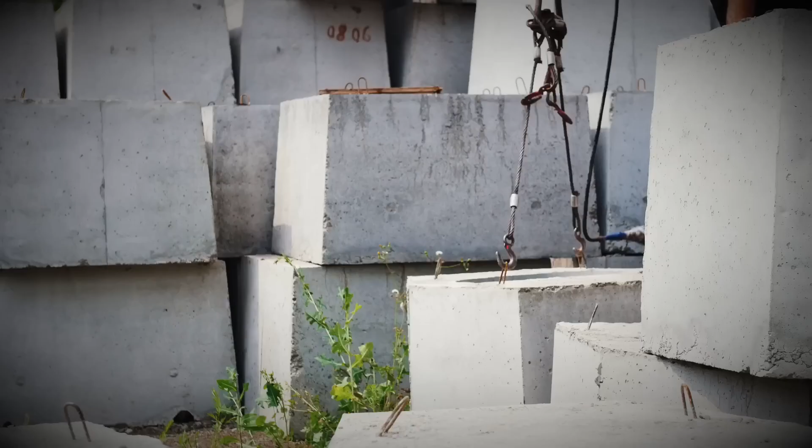If planned correctly, high-rise blocks could have similar square footage to a small terrace house. And once all the garden space is taken away to be replaced with communal areas, the overall space available to residents would actually be greater. The new towers were to be easy and quick to make due to prefabricated building methods, and thus able to transform social housing stock to a community and socially focused ideal.

Things like streets in the sky were envisioned as a modern take on the old-fashioned neighbourhood community feeling. This was the era that fostered a greater societal safety net, such as the NHS and nationalised British Rail after all. I suppose the optimistic feeling must have blinded architects to the nightmares this type of social housing would turn into, when it was discovered that tower blocks, enclosed walkways and open spaces that separated them would become a breeding ground for crime. Anyways, this utilitarian design style was called brutalism and would become a hallmark of British design in the 1950s and 1960s.

The Essex town of Harlow would welcome the UK's first residential tower block in 1951, and many more throughout the country for the next 10 to 15 years would be thrown up. The cheapness and ease of construction found its way to a new residential estate in Newham, East London. Ronan Point. Newham Council was birthed in 1965.

It was the result of a ménage à trois of 3 previously independent county boroughs: East Ham, West Ham and Woolwich. The new local authority completely enveloped East and West Ham, but only a part of Woolwich in the form of the borough north of the River Thames, which is around here on a map. The brand spanking new borough, although still in its packaging box, had old problems. Housing. It had roughly 9,000 people on the waiting list for social accommodation. As such, it sought to try and solve this problem with new housing projects.

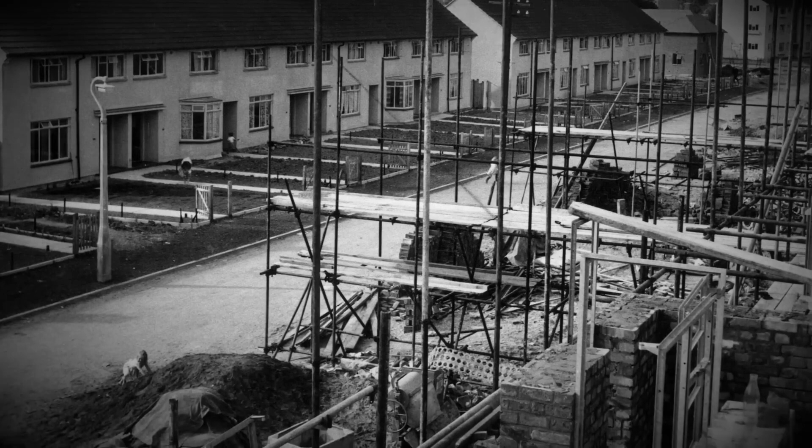Roughly a quarter of the borough's housing stock had been bomb damaged, with the remainder not meeting modern standards. Many had no running water and electricity. Rather than retrofit, demolition and reconstruction was the plan. Up to the 1960s, much of the council's construction projects were of 2-storey houses and 3-storey flat blocks. Well built and utilitarian, they were good but required skill to build them, and that was lacking in the country. The skill drain can be traced back to the war, where many of the previous generation of bricklayers, carpenters and builders were lost. Just look at post-war houses compared to pre-war houses.

Gone were the bay windows and ornate woodwork. For example, my house is a pre-war construction. A new, radical and easy to build method was required. The problem wasn't unique and, as we saw earlier, had been apparently solved with the implementation of high-rise buildings.

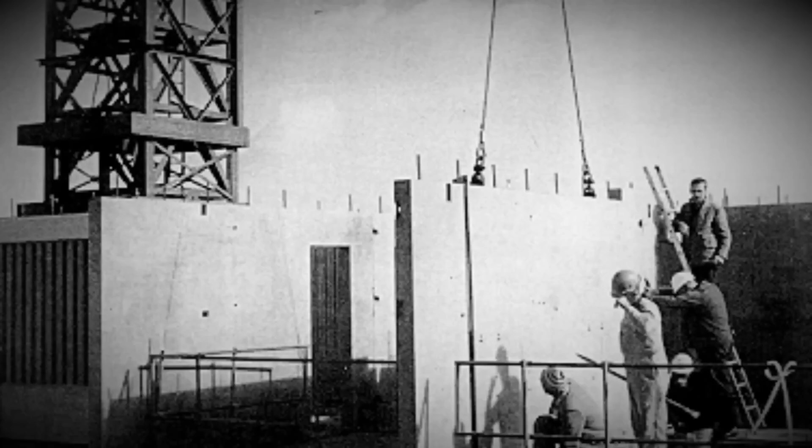The council's architects looked at two prefabricated concrete building systems, one by French engineer Raymond Camus and another by Danish civil engineering company Larsen & Nielsen. Both systems made use of off-site prefabricated concrete panels to be slotted in together, much like a store-bought garden storage cabinet. This was called large panel system building. Out of the two methods, the Larsen & Nielsen system made use of the least amount of skilled labour.

To use the system for the new development, the council had to work with the UK licence holder, Taylor Woodrow Anglian Limited. Now there was actually a financial benefit to building as tall blocks as possible. This came about from the Housing Act of 1956, which introduced subsidies to local councils for every floor that was built above 5 stories tall.

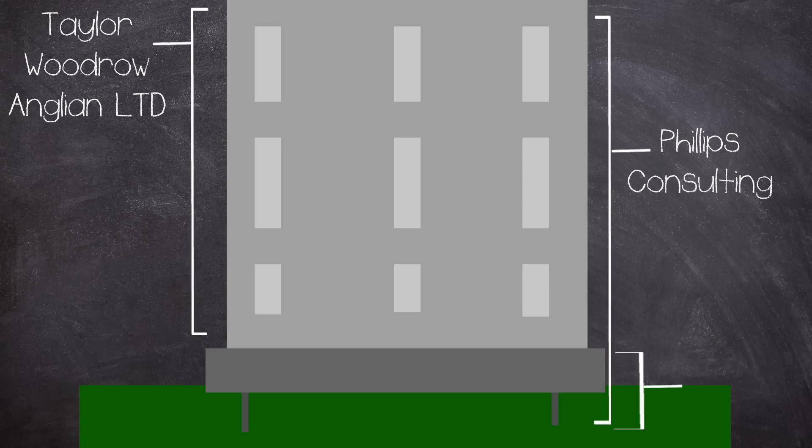Taylor Woodrow Anglian insisted on using a structural engineer called Phillips Consultants Limited, a wholly owned subsidiary of Taylor Woodrow Anglian. To add further conflict of interest, Phillips were hired for the design and construction of the foundations solely by Newham Council, but were employed by Taylor Woodrow Anglian directly for the actual building construction. The contract for 9 blocks was set at £5 million, roughly £500,000 per tower. Ronan Point was to be the second building in this contract.

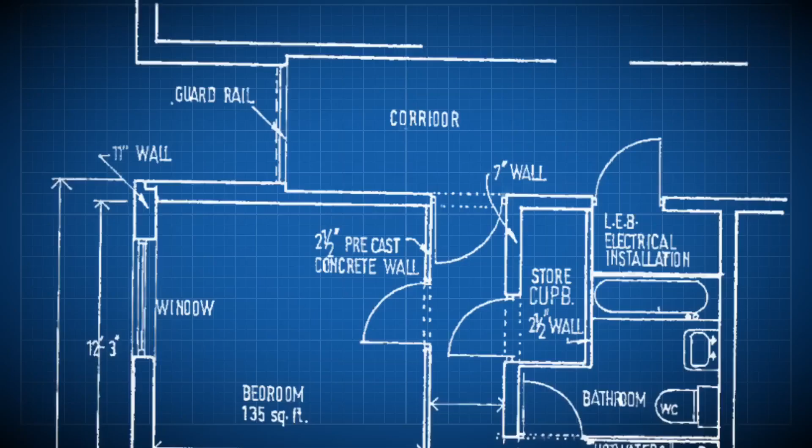The tower was to be 200 feet tall and contain 110 flats over 22 floors, and was built upon parking areas below. Each flat had a number of mod cons, including underfloor heating, gas, running water and electricity. The structure relies on load-bearing concrete panels. These consist of spine walls that make the main corridor, in addition to a number of cross walls at right angles to them and the flank walls that form the end faces of the tower block.

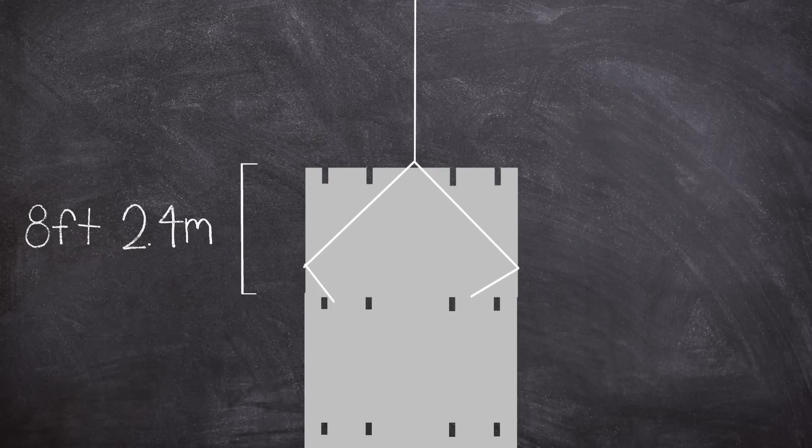The jointing between panels and floors is fundamental to the integrity of the structure. Each load-bearing wall is 8 feet high, roughly 1 story high, 9 feet wide and between 6 and 7 inches thick, and factory made of solid concrete. The floors are built of precast concrete slabs, each, except for the corridor floors, about 13 to 15 feet long. They are also 9 feet wide and around 7 inches thick. Unlike the walls, these are reinforced and are lightened by a number of circular cores.

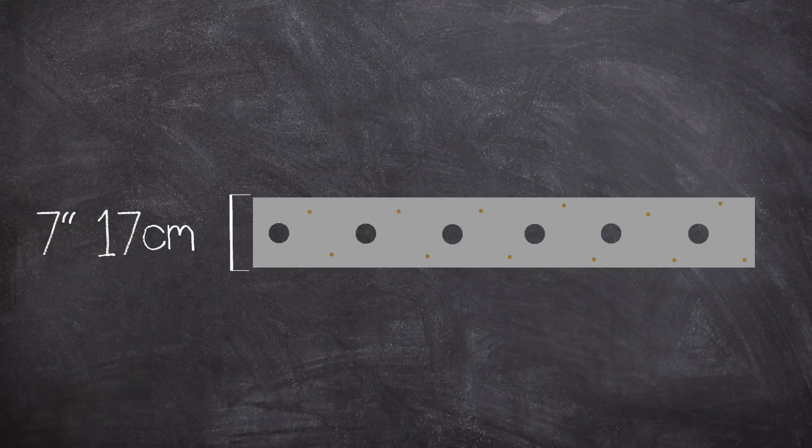To keep the whole structure together, a number of types of joints were employed. Vertical joints between the adjoining walls use overlapping U-shaped steel rods, through which a vertical steel rod is threaded. The whole joint is then concreted in situ. In the horizontal joints between floor slabs, the space between adjoining slabs is filled with in situ concrete, into which a short steel rod is placed over the supports.

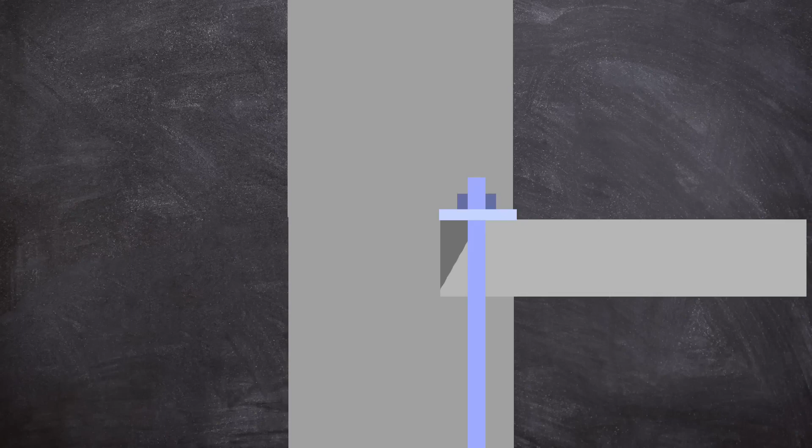The horizontal joints in the load-bearing walls at floor level have nibs projecting from their ends that rest upon the shelf near the top of the wall panels, and the space between the ends of the opposing floor slabs is also filled with in situ concrete. Metal tie plates are at intervals along these joints to help tie the floor slabs to the lower wall panels. When done correctly, all these joints should ensure a strong and stable building.

It would take Taylor Woodrow Anglian roughly 2 years from start to final handover to complete Ronan Point. The council took control of the tower on the 25th of March 1968 and immediately started welcoming residents into the new high-rise slice of living. Even though we consider them ugly now, the novelty of living up high in the sky drew a lot of people to the tower blocks. But this dream couldn't stay up in the clouds for long. Quite literally.

The disaster. It is 5:45 a.m. on the 16th of May 1968. Ronan Point has only been open to residents for roughly 2 months, and the occupant of corner flat 90 on the 18th floor has got up to put on her slippers and dressing gown and went into the kitchen to start filling her kettle to make a cup of tea. The resident of the flat is Ivy Hodge.

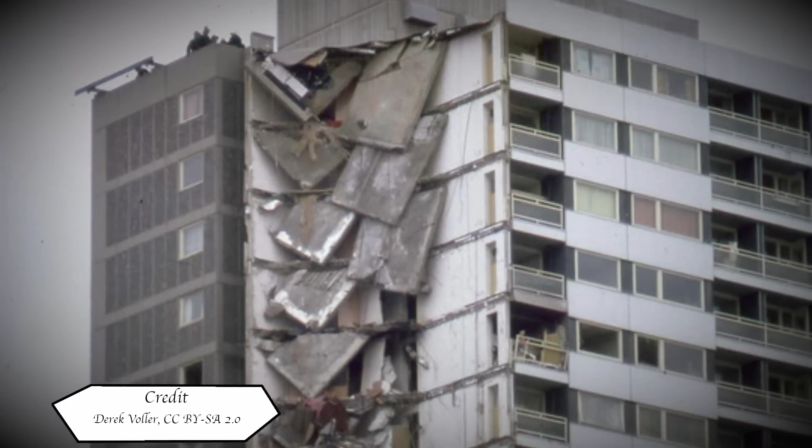She lit a match to light her stove. The spark ignited a gas explosion. Hodge was blown across the room. In a later statement, she would recall, "I do not remember any more until I was on the floor, looking at flames on the ceiling." The explosion blew out flat 90's flank walls, which were supporting the weight of the floors above it. This resulted in a progressive collapse of the southeast wing of Ronan Point. 4 were killed instantly in the collapse. Luckily, due to the time of day that the explosion happened, most residents were still in their bedrooms.

And, as the southeast corner consisted mainly of living rooms, most were safely asleep away from the danger zone. Also, in a stroke of luck, 3 of the 4 flats immediately above Hodge's were unoccupied, further reducing casualties. On the night of the explosion, there were 260 people inside the building, and on top of the deaths, 17 were injured. Residents were evacuated and the block was closed to the public. Many of the inhabitants were rehomed in another tower block about half a mile away.

But how did this new block of flats fail so catastrophically, especially from a gas explosion, which could always be a possibility? Due to the numbers of other buildings constructed in a similar way, the UK government understandably wanted to discover how Ronan Point could have failed. They commissioned an inquiry led by Hugh Griffiths QC. Well, they would find some worrying shortcuts made during Ronan Point's design and construction.

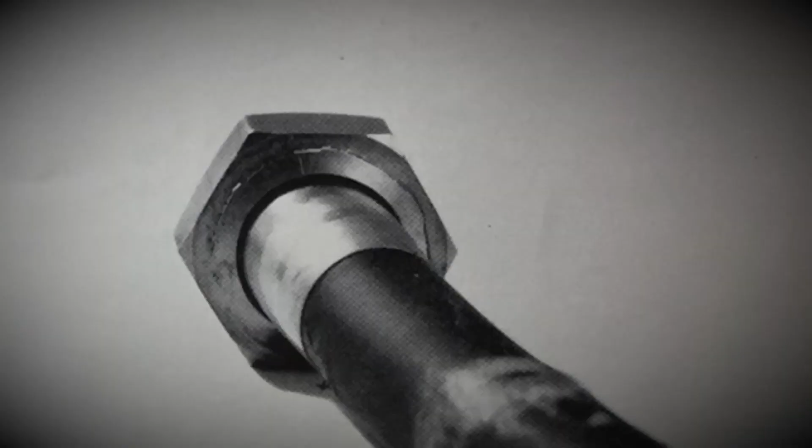The cause. The investigation initially looked at, naturally, what caused the explosion. It was discovered that Hodge had, upon moving in, brought a new stove with her. This gas appliance was installed by a friend as a favour. The investigation found that the installation was acceptable, although eventually a nut used to connect the gas line to the oven had failed and thus caused the explosion.

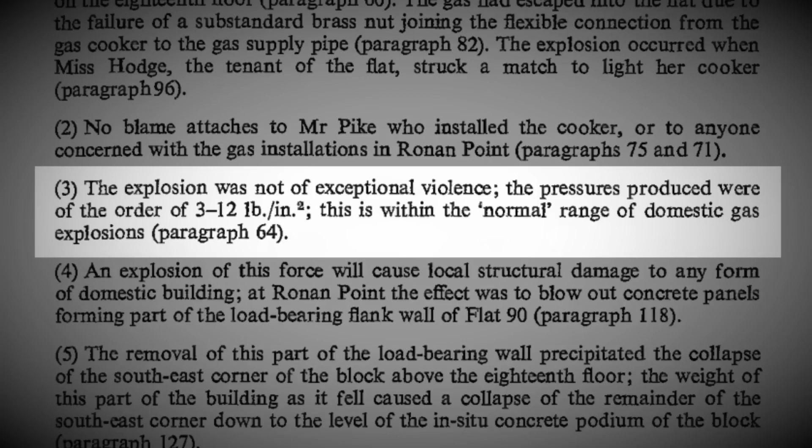But the main issue was, how did Ronan Point not survive the explosion? Even the investigation stated this: the explosion was not of exceptional violence. The pressures produced were in the order of 3 to 12 pounds per square inch. This is within the normal range of domestic gas explosions. The root cause had to be in Ronan Point's construction.

Well, it wouldn't take long for investigators to find that the tower design was less than satisfactory. It was discovered that the building had not been designed to withstand a progressive collapse, but it wasn't required to in the regulations at the time. The building regulations and codes of practice do not take into account the possibility of progressive collapse. Neither did the designers of the building.

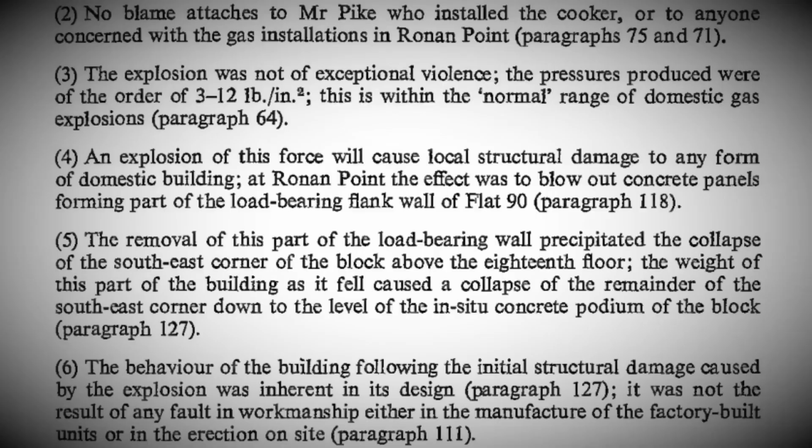The inquiry, however, didn't say that there were any issues with the workmanship at Ronan Point, and as such thought that the tower could be rebuilt, re-strengthened and put back into use. The inquiry put the blame squarely at the outdated building regulations, which seemed to have not considered progressive collapse a thing. This thinking was based on earlier tall buildings being made out of reinforced concrete and steel frames, which are much less susceptible to a house of cards-like effect that Ronan Point experienced, due to having multiple redundancies for the load to spread out over.

The southeast corner of Ronan Point was rebuilt as a new section of apartments, then joined to the existing building via a series of walkways. Many would refuse to move back into Ronan Point and instead be rehoused throughout the borough. The event definitely worried the wider public to the risks of high-rise flats.

Enter architect Sam Webb, someone who I think might pop up again on this channel in the future. He became interested in Ronan Point and started investigations of his own. Residents allowed him into their flats to inspect the overall quality of the building, and it was not good. He found that Ronan Point swayed up to 150 millimetres from the centre line in high winds, excessively loading the building, which could eventually cause one of the vital bolts to fail. Webb gave the reinforced Ronan Point at best 15 more years before a total collapse could occur.

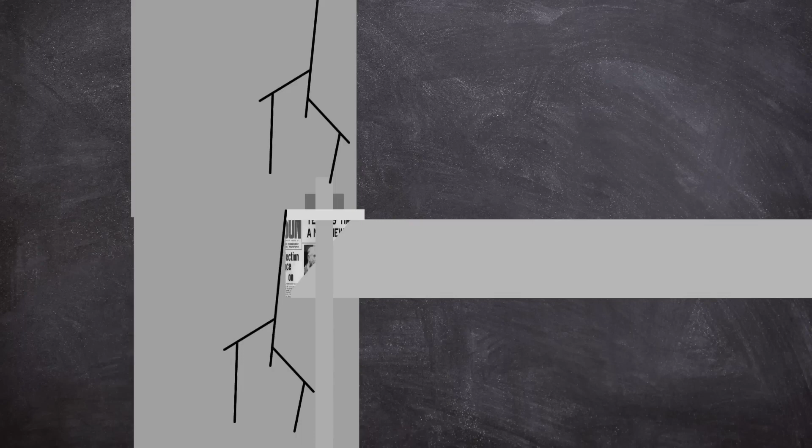After years of convincing the council, it eventually evacuated the building in 1986. Webb somehow managed to get Ronan Point dismantled carefully rather than by the traditional blowing-up demolition method. This was in order to forensically inspect the tower. It was found that several joints were missing the concrete required to seal the connections. In some cases, rubbish and newspaper was all that was found. Lower load-bearing concrete panels were found to be cracked and multiple bolts were bent beyond comprehension. This resulted in Webb's prediction of 15 years seeming way too optimistic.

It's a miracle that Ronan Point was demolished when it was, as just under a year later, in October 1987, the Great Storm would hit, an event that would have most likely finished off the tower. The disaster ruined the public's confidence in tower blocks, but hundreds still exist across the country. Just look at many boroughs of London. A 60s or 70s tower block is certainly going to be in view.